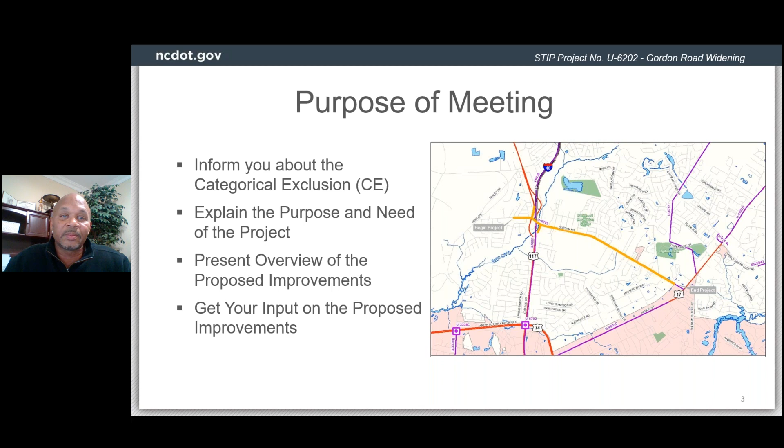So let's talk a little bit about your participation. Your input and participation in this process is extremely important, not just for this project, but for any DOT project. All comments, no matter how they are submitted, carry the same weight. We have provided multiple ways to participate, and you can make your voice heard by submitting your comments tonight during the public comment portion.

You can also go to our website where there is a link to our public engagement portal. You can send an email to the Gordon Road Widening at publicinput.com email address. And if you're not a big fan of computers, you can call your comments or questions in using the project hotline, and those will be automatically transcribed into our database so we can follow up with you. If you have a carrier pigeon, you can send that in too. But the point I really want to stress is the importance of getting feedback to us.

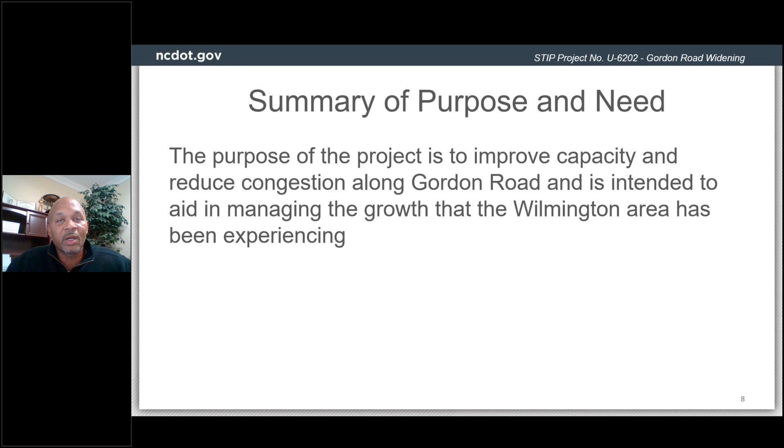Now, the proposed improvements are consistent with the long-range transportation plans for the local municipalities within the study area. The local governments within the Wilmington Urban Area Metropolitan Planning Organization, as well as NCDOT, have included this project in their adopted plans. The funding for this project is currently state funding using Build NC bonds. But because there may be an opportunity to use federal funds, we are preparing a federal categorical exclusion for the environmental document type, just in case.

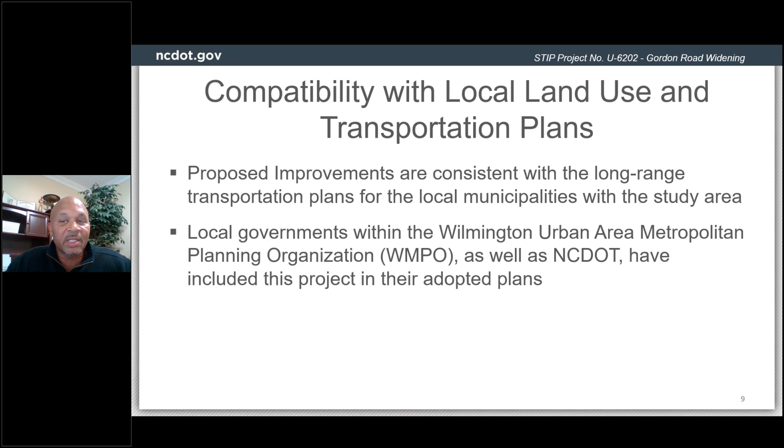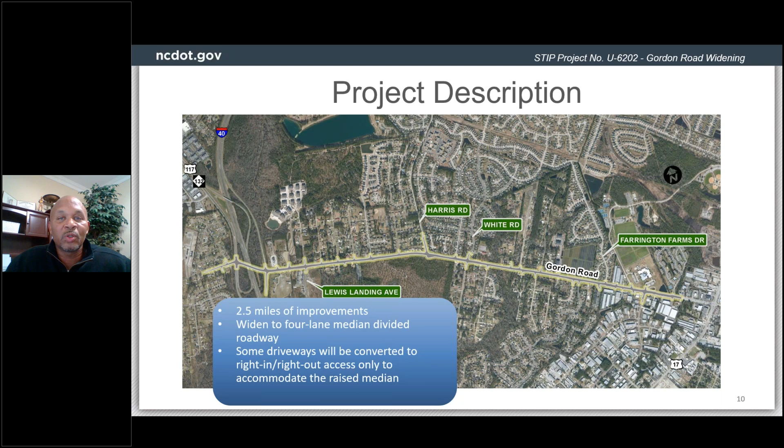So to meet the purpose and need of the project, again the foundation of the project, the proposed design would improve about 2.5 miles of Gordon Road by widening to a total of 4 travel lanes. That's 2 travel lanes in each direction, from I-40 to US 17 on Market Street in New Hanover County. The proposed typical section will include 2 11-foot travel lanes in each direction with curb and gutter, with a 10-foot multi-use path on the north side.

The project would install what are known as reduced conflict intersections, which would redirect motorists from side streets without traffic signals into turning right, so it'd be right-in right-out only onto Gordon Road for a lot of intersections. If you want to make a left turn, you make a right, go down a certain distance to a U-turn bulb or to a signal, and make a U-turn to make that left turn. But I will play a short video explaining reduced conflict intersections in just a few minutes.

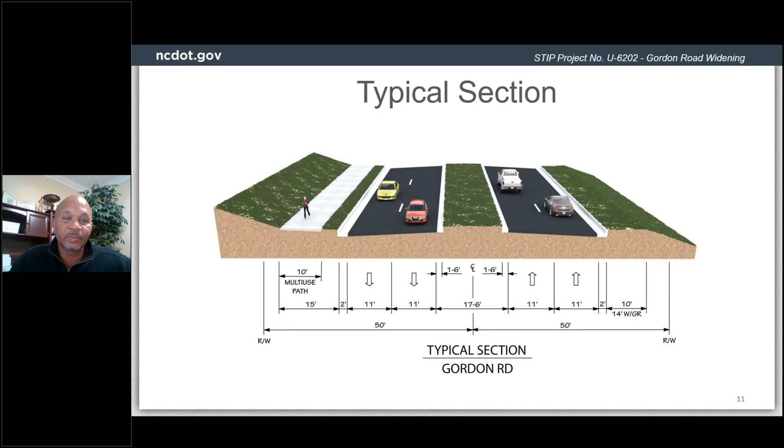Project impacts. This is a snapshot of the impacts based on the preliminary designs, but I will point out the one that I think most people would be interested in, and that is the estimated residential relocations. Again, that's based on the preliminary design, showing our worst case scenario at this point. Right now, based on that design, we are estimating a potential of 14 residential relocations and no businesses.

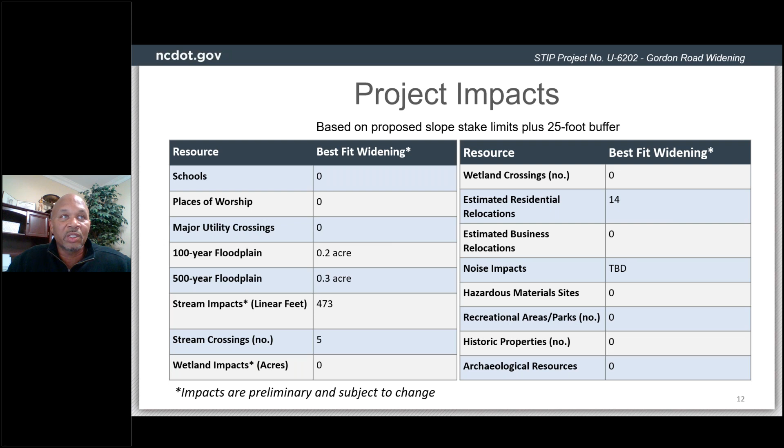Project costs. Again, we look at project development and design, right-of-way acquisition or property acquisition. That is the acquisition of all the property that will be needed to not only construct the project, but to maintain it. Utility relocation and construction costs all come up to $49 million. Again, these are preliminary estimates and subject to change.

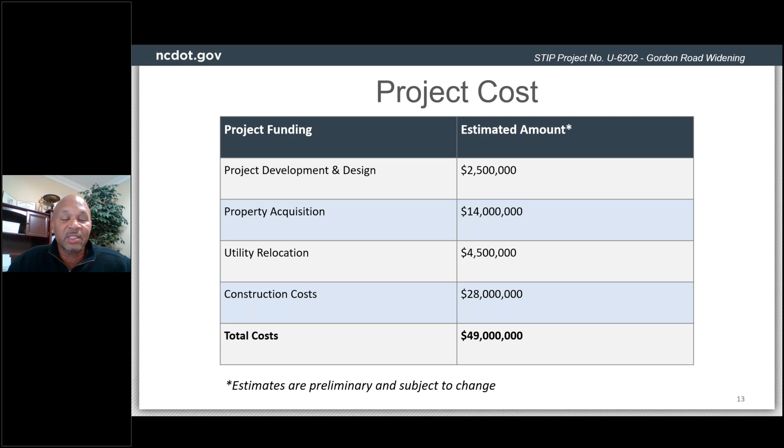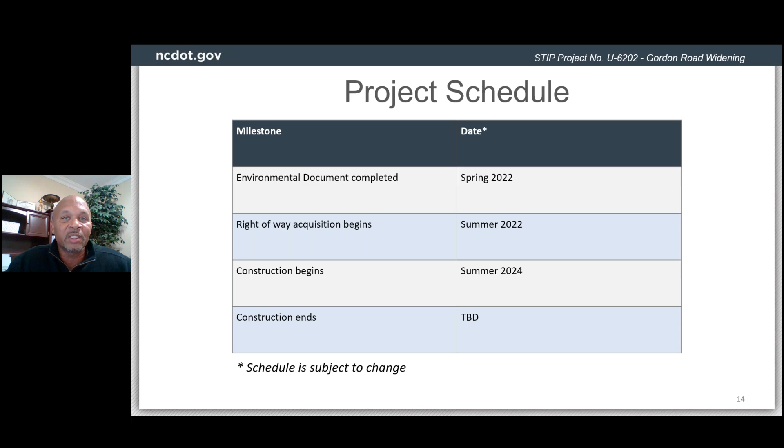Project schedule. The environmental document, that categorical exclusion I just talked about, is expected to be completed in spring of 2022. The right-of-way acquisition phase will begin next summer, with construction right now scheduled to begin in the summer of 2024. In talks with some of our division staff, we believe that the construction time would range anywhere from 3 to 4 years. Again, those schedules are subject to change.

We'll talk a little bit about the maps. I'm going to quickly go through the maps. The maps are available online, but when you see the maps, each map has a color-coded legend that represents the proposed improvements. The video on our website will explain how to read those maps, and there's also a video explaining reduced conflict intersections.

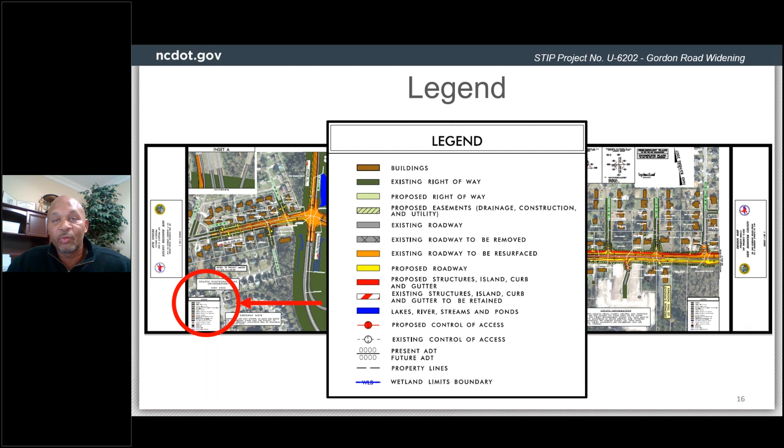So we'll start at the western end of the project. Let me pick my laser pointer real quick. Starting on the western end, heading east toward Market Street, the improvements begin just east of Brierwood Road. In this area, we're providing an additional through lane through this intersection, and an additional left turn lane onto College Road if you're heading westbound.

Continuing east, the I-40 on and off ramps, this intersection with Gordon Road - there's no real big change here other than it will be signalized.

Heading west, heading east, there will be a leftover provided for the Shell station, and then your next full movement intersection will be at Blunt Drive. And then next we have a leftover heading eastbound onto Lake Emerald Drive.

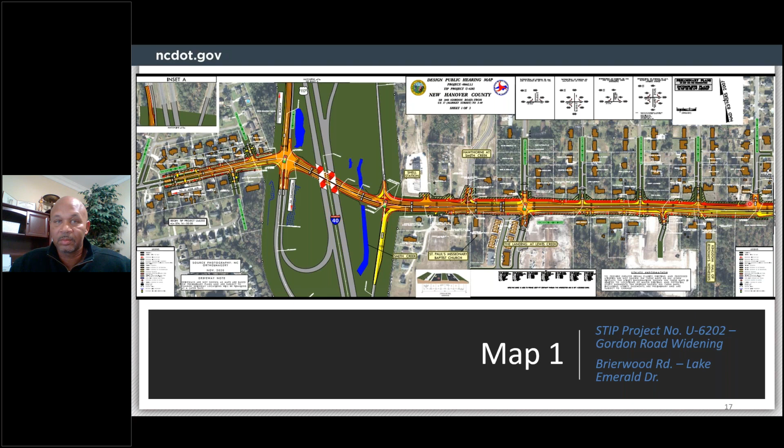Continuing to the east, on map 2, the next full movement intersections are at Harris Road and White Road, where you'll see a big additional pavement for a U-turn bulb to accommodate larger wheelbase vehicles. Then your next leftover heading eastbound is onto Daniel Boone Trail, and there's a leftover heading westbound onto the community opposite Daniel Boone Trail, though I don't know the name of that road.

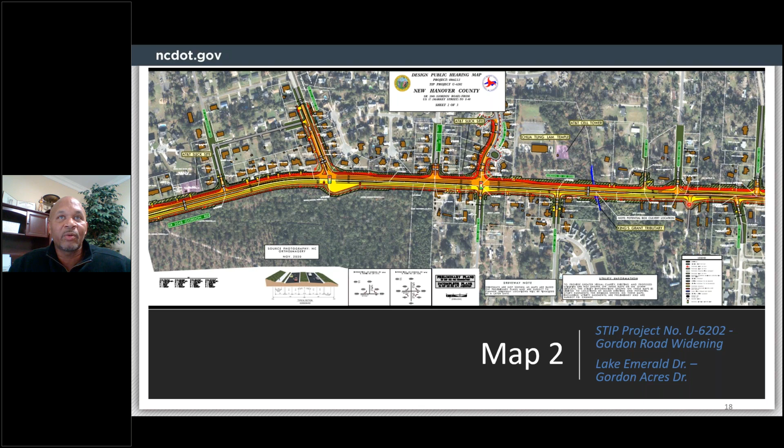Continuing to the east, we come to a leftover at Vorals Lane, I hope I pronounced that correctly. And then westbound, there is a leftover onto Wood Sorrel Road.

Continuing east, there is a full movement intersection at Farrington Farms Drive, followed by another at Netherlands Drive. And then finally, at the end of the project, there will be a leftover eastbound into the Cape Harbor Apartments.

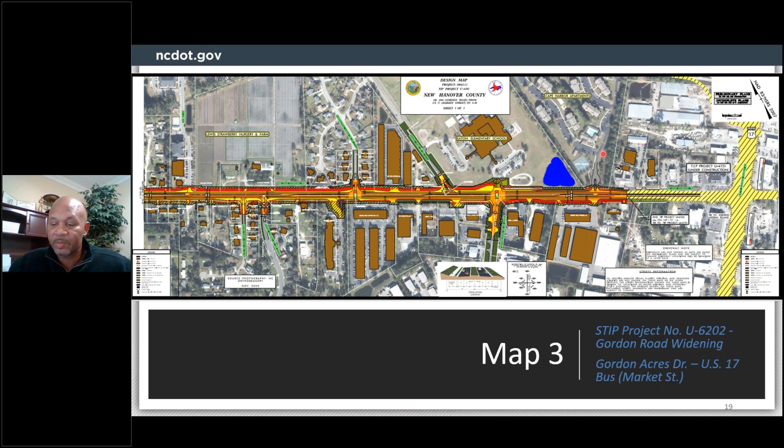Now I want to play a visualization we created, a 3D rendering fly-through of the project. I'll play that for you right now. It's about 3 minutes long. There is no audio to it, so it'll be quiet, but you can watch this video showing a 3D rendering of the proposed designs. Here we go.

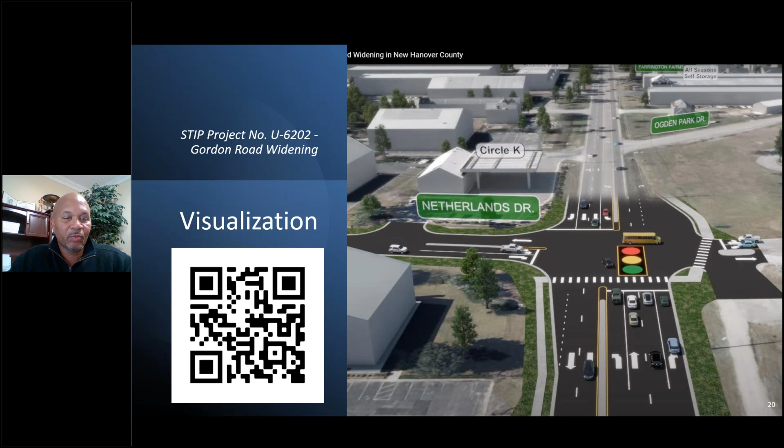Let me wrap up here and we'll get to the most important part, the public comment period. But first I want to cover the right-of-way procedures. Once decisions are made regarding the final design of the project, our location and surveys unit will go out and stake the limits of the project in the ground.

If you are an affected property owner, a right-of-way agent will come out and meet with you. They will explain the plans to you, how it affects you as a property owner, and your rights as a property owner. If permanent right-of-way is required from you, then an appraisal will be done.

Based on that appraisal, a right-of-way agent will come back and make a written offer to you. That written offer will be based on the current market value of that property at its highest and best use.

In this process, the department must treat all owners and tenants equally. We must fully explain the owner's rights, we must pay just compensation in exchange for property rights, and we must furnish relocation advisory assistance.

So if your property is to be acquired and you're being displaced as part of the project, additional assistance in the form of advice and monetary compensation is available.

But if anyone has detailed right-of-way questions, I suggest you contact Ben Socks, who is on this meeting tonight. Ben, I would ask if you don't mind to put your email or phone number in the chat box. Ben and his staff are very knowledgeable and very good at what they do, and they can let you know what you should expect throughout that process.